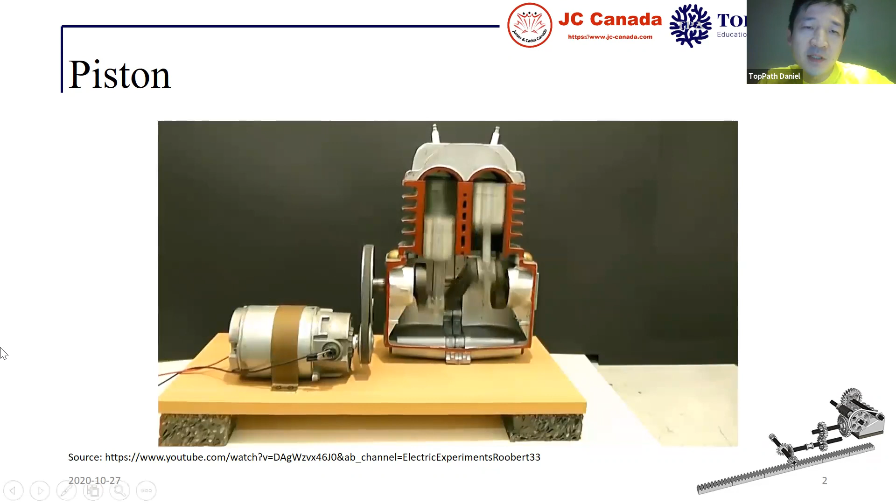Now let's have a video. This one is a very important part in our car. So yeah, just like this, right? So we need this thing to drive the wheels, so it can go very fast like this, right?

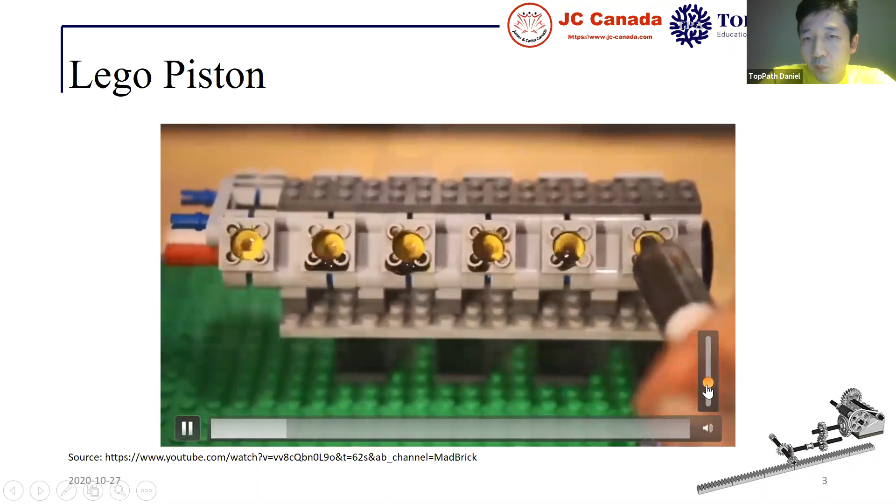Okay, now today we try to build one. And also we also have Lego piston parts like this. Yeah, they are official Lego parts, right? They are all Lego pieces.

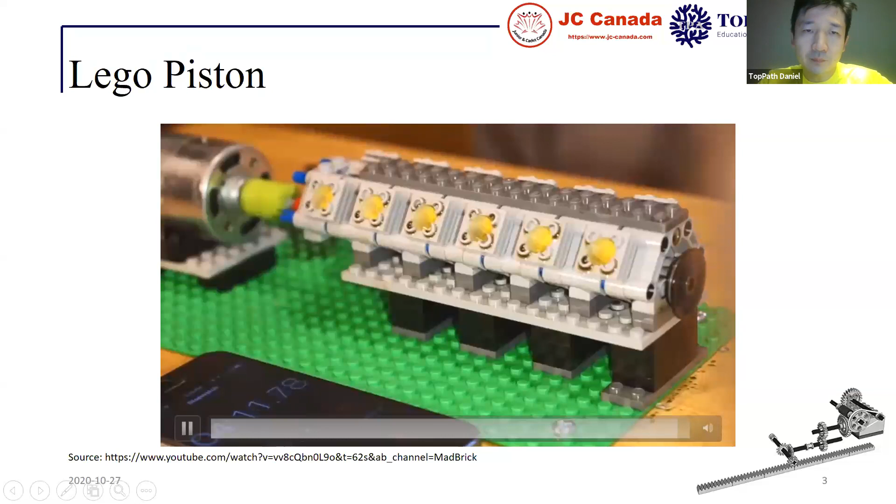Yeah, it can also run very fast like this. But inside you see we have these yellow things, right? So we can learn something about the structure inside.

Okay, it's called slider crank linkage. So we use slider crank linkage to convert rotary motion into back and forth linear motion.

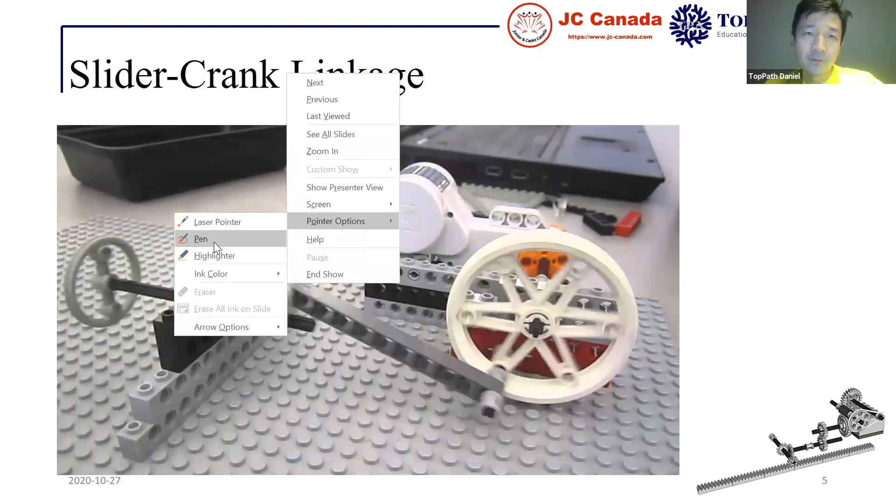Okay, now another video. Like this. So the yellow thing is this top, right? Okay, let me show you. Where is my pen? Okay, so let's see the video first.

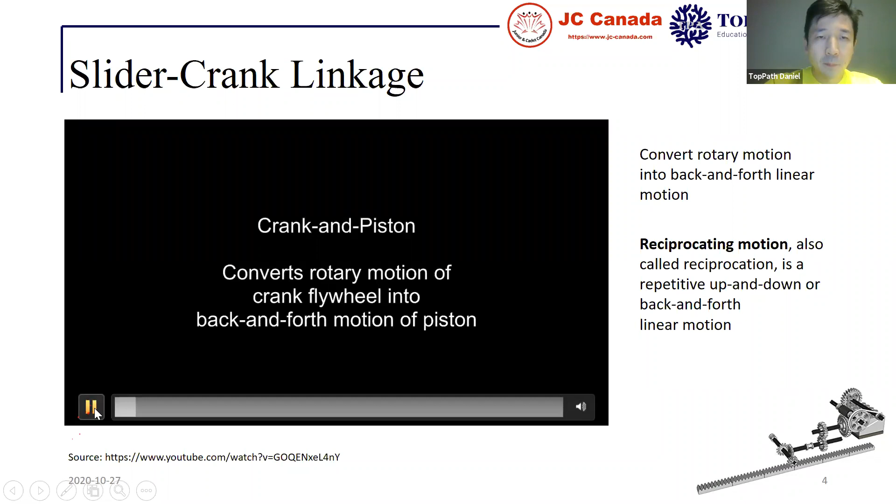Yeah, so we try to build this structure today. Okay, this is called slider crank linkage.

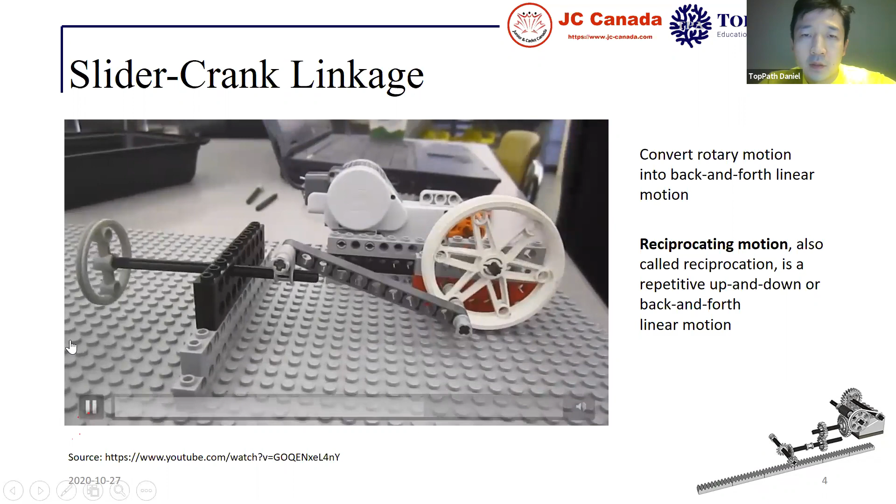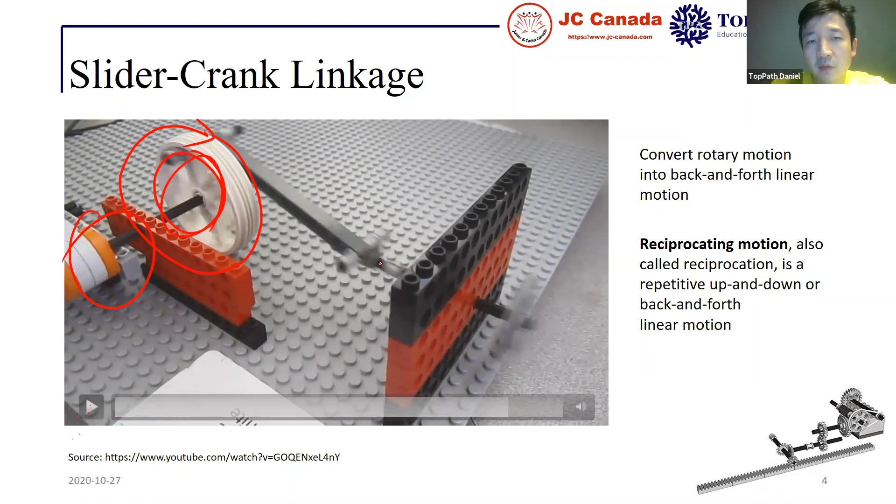So the reason why we need this is, okay, we have our power here, right? Motor, but this is a rotary motion, so we turn something, right? But usually we need back and forth forward. We need a linear motion, we need a straight line. So we can use this structure to convert rotary motion into linear motion.

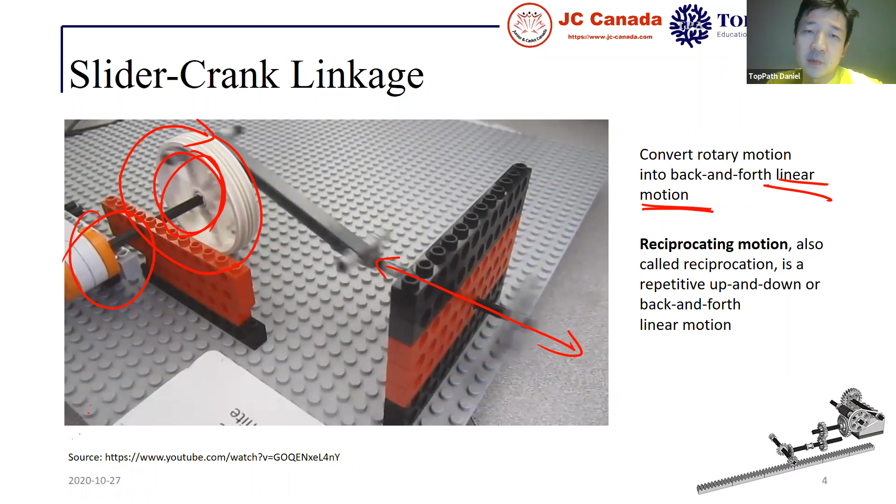Okay, for example, we turn this wheel and the black axle will go forward and backwards, right? And here we have two connection points. We need to use smooth pins or axles.

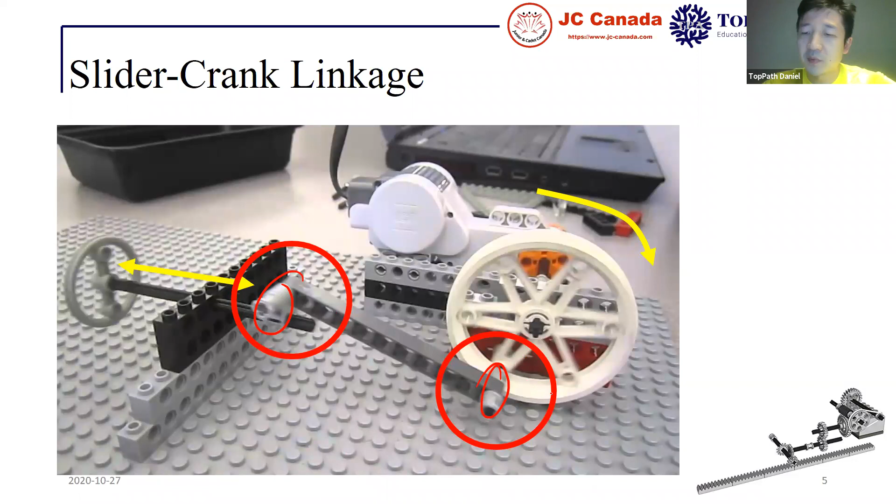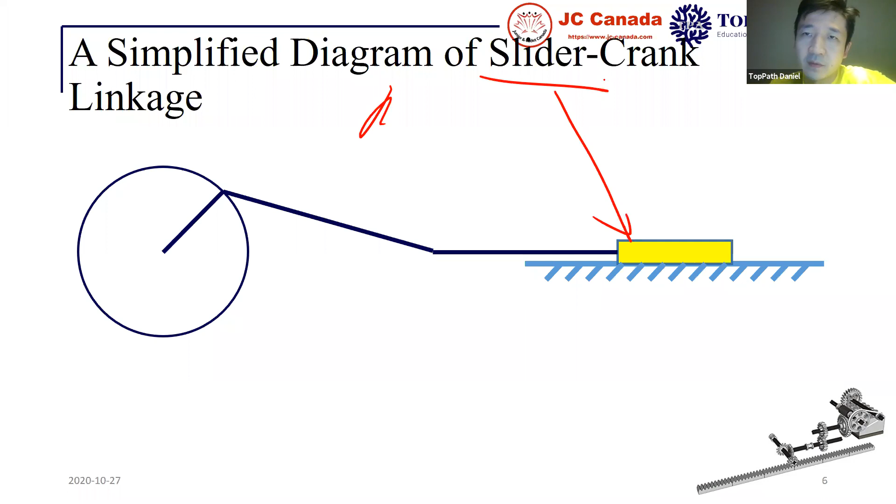So, for example, like this. Okay, so slider, which one is slider? Slider is this one. Okay, and the crank, we already use crank, right? So we turn this wheel, and this slider will go, okay, like this, right and left, right? A straight line.

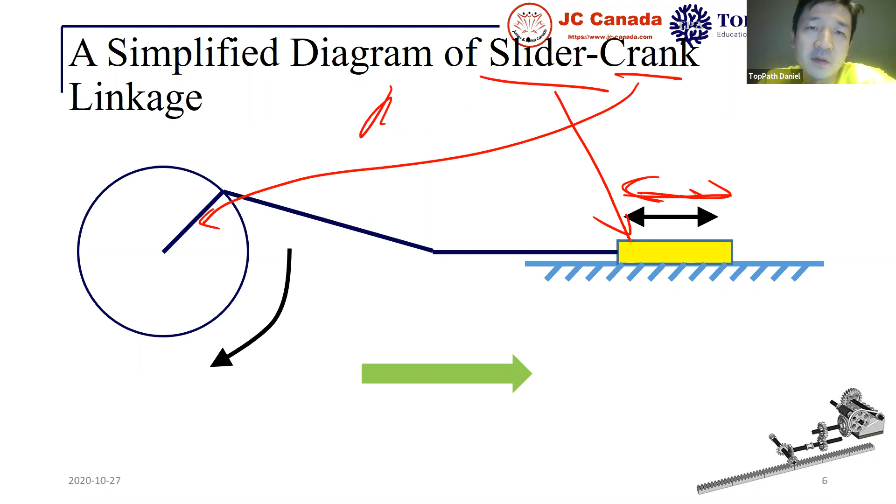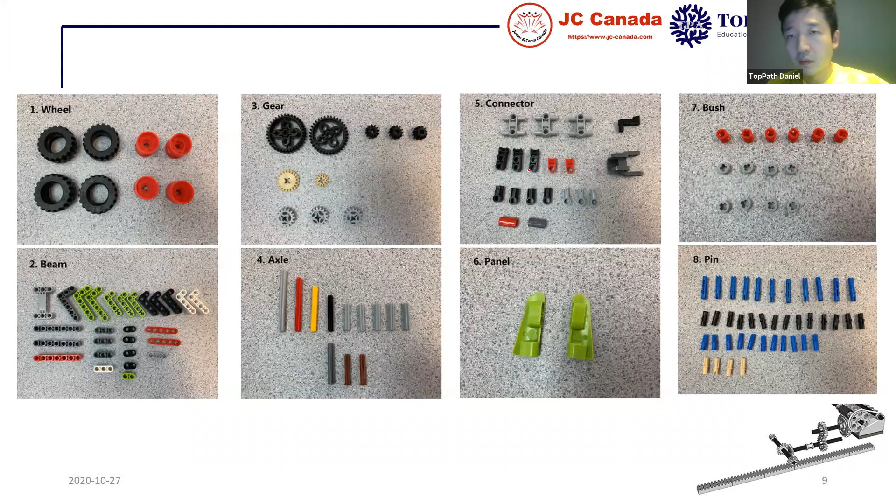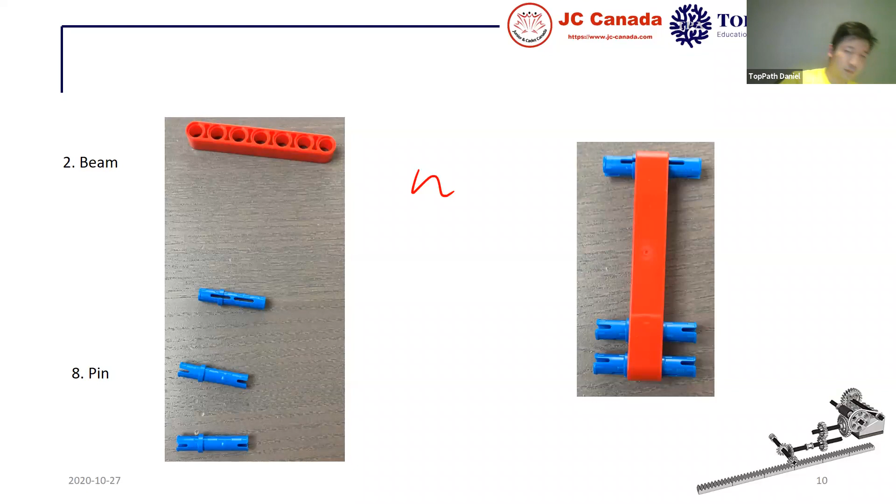Okay, done. Okay, next one. Green beam. Yeah, easy.

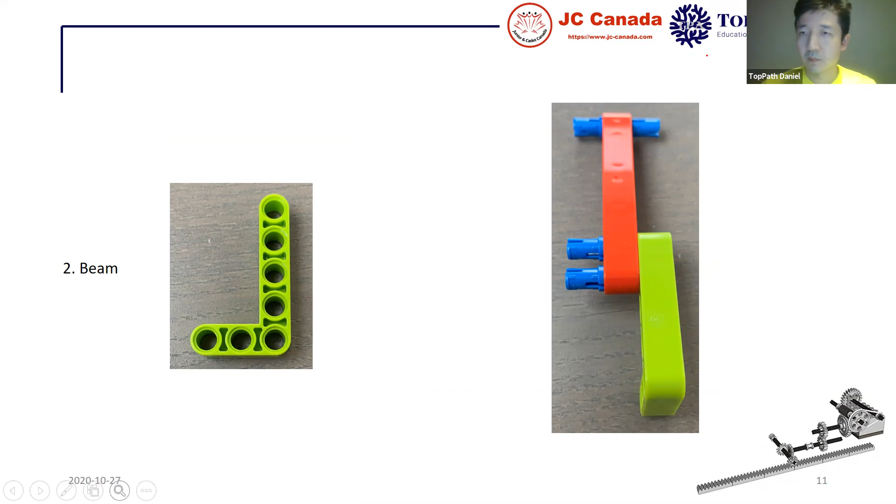Yeah, okay, good. Now four pins, okay, 4 pins. Okay, we have 1, 2, 3, 4 pinholes, and the last one is a cross hole, okay? So we use the 4 pinholes. One, two, three, 4. Okay, good.

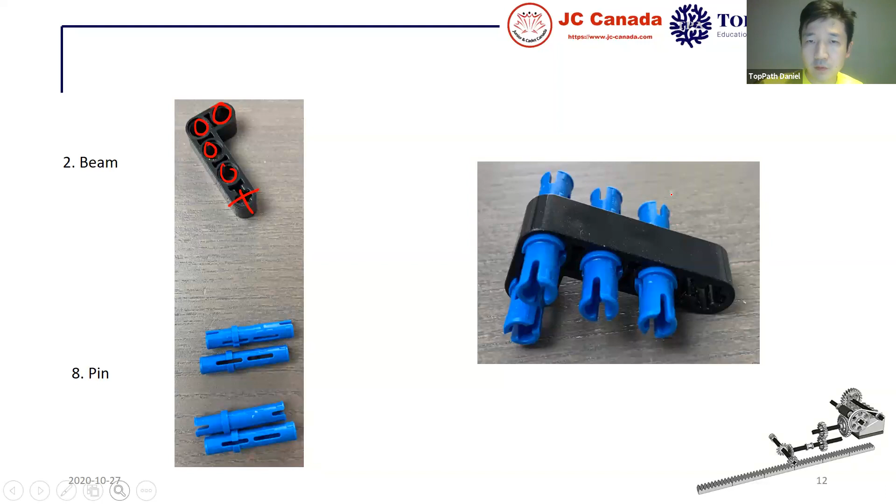Yeah. Okay. 1, 2, 3, 4. 4 long pins. Okay, good. Now two connectors, 2 pins.

So you already built something. So now you know these pieces, right? Yeah, good.

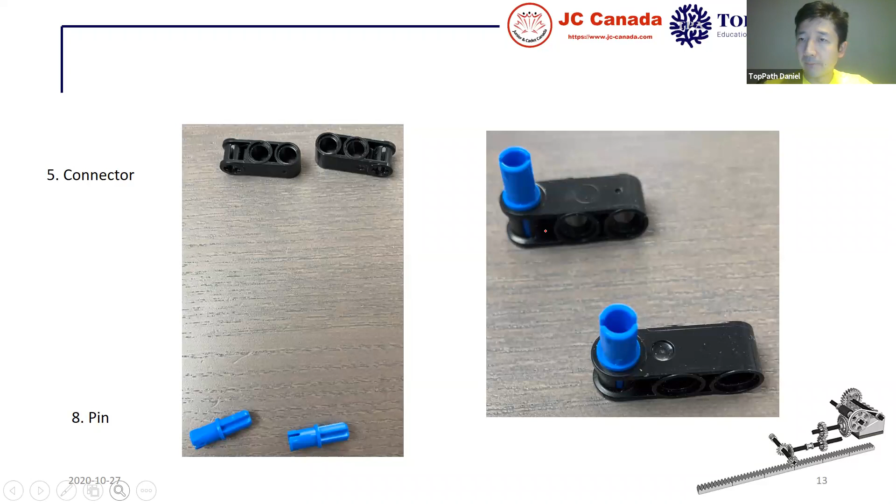Good. Next one. Okay, so we connect everything. Okay, this is the L, right? This is the L and 2 connectors. Okay, 2 connectors.

So the black L is here. Okay, the black L is here. Yes, we use the two blue pins, right? Okay, we connect all 3 parts together.

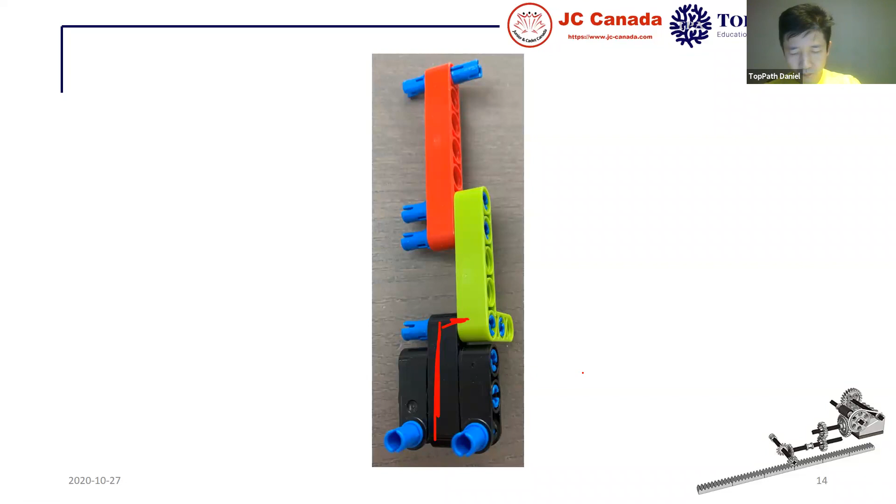You good? Good. Next one.

So let me see. We can put this bush here, and then axle, and then this green beam. Okay, I think yeah, maybe better. Okay.

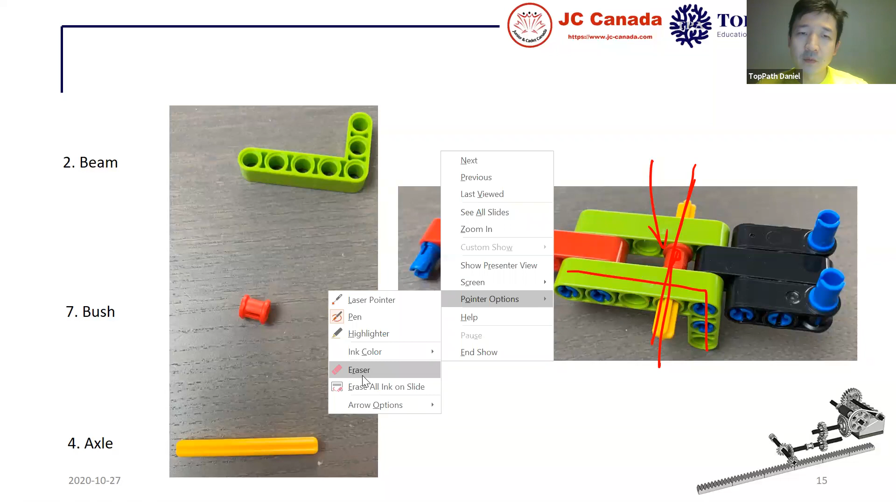Is that correct, Ethan? Where is this yellow axle? Which hole? Which pinhole? Okay, pay attention to this pinhole. Oh, even you, the same. Is here. Okay, 1, 2, 3, 4.

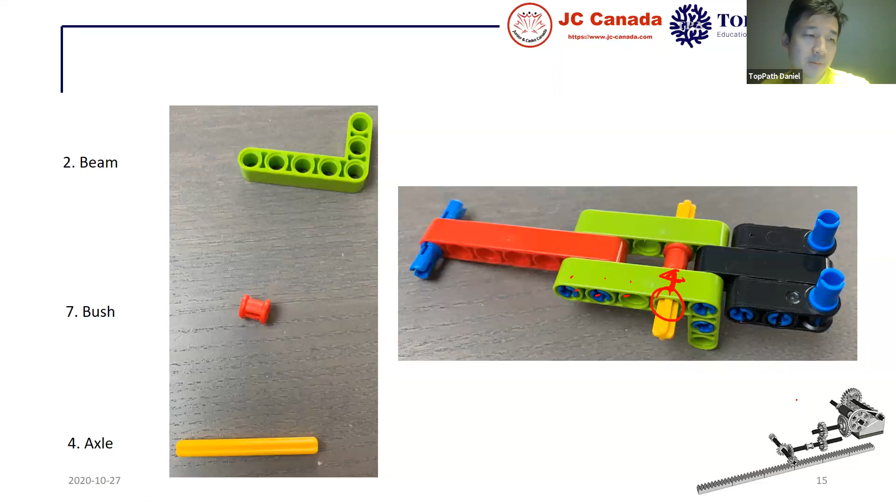One, two, three, four. Okay, the fourth one. Yeah, good. Now it's good. Because later we'll put the two black gears on this. Okay, these two sides.

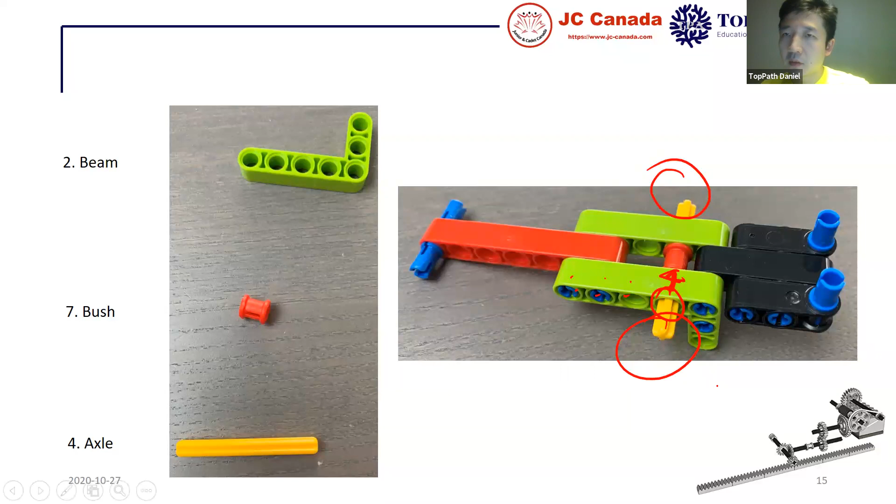Next one. This is what? 3 pin and 3. This gray is also 3. Okay.

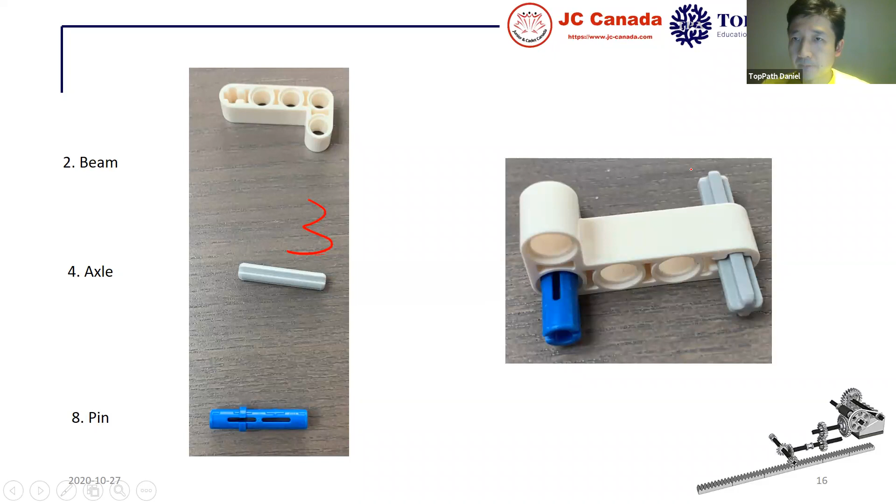The first hole is a cross hole, right? First one and the last one, okay.

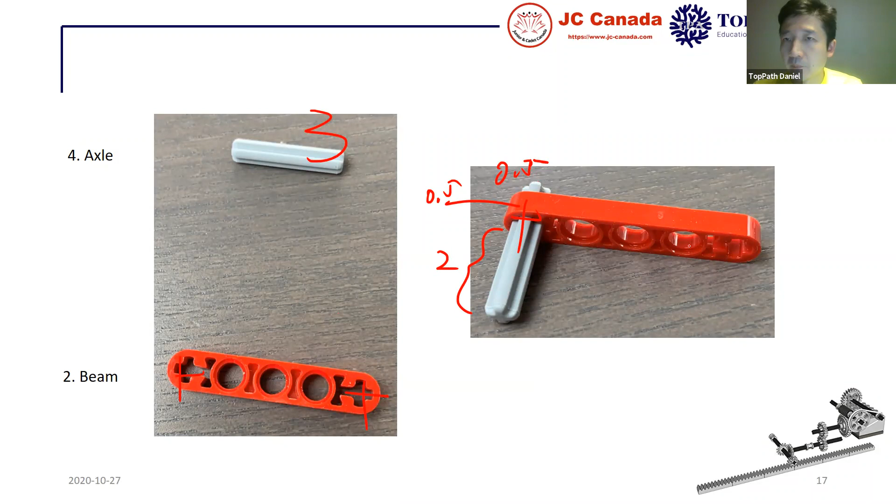Now, this is the axle, okay, on this half beam, okay. So we connect this pin. This is the middle one, okay. This pinhole is the middle one. And we use where? We use this pin, right? We use this pin.

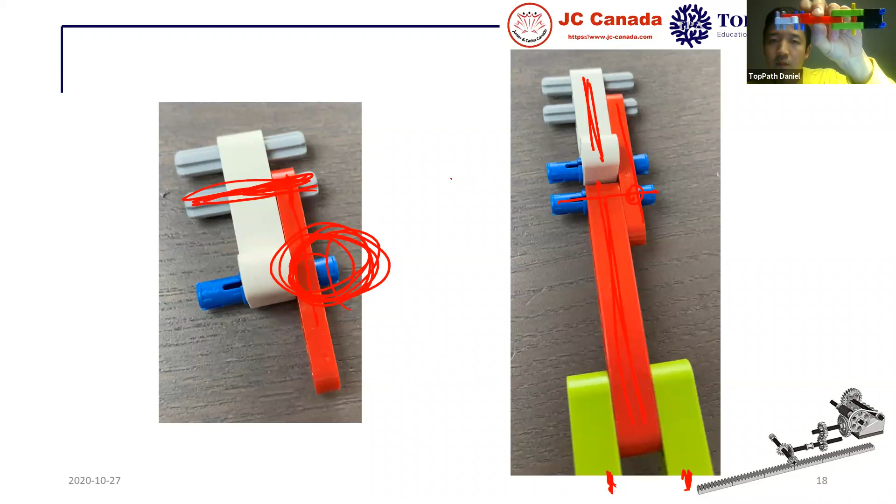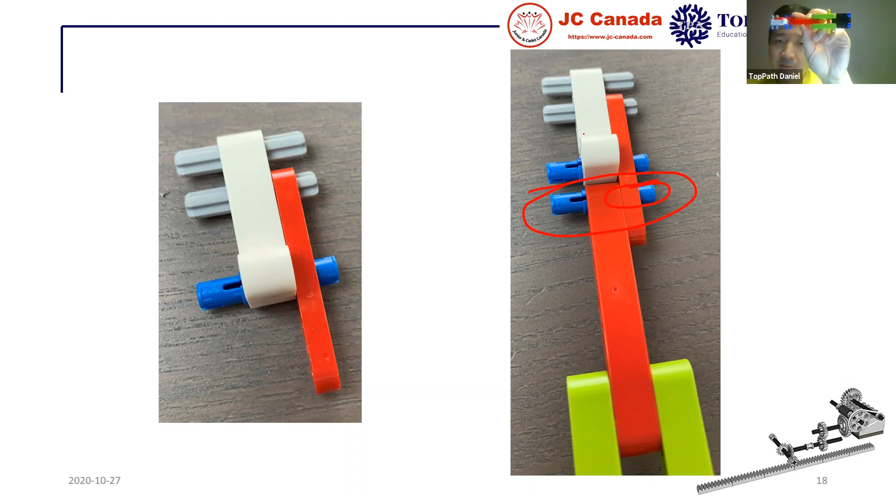Here we have only one connection point, this one, this blue pin. We have only one connection point here for now, and later we'll have the second one.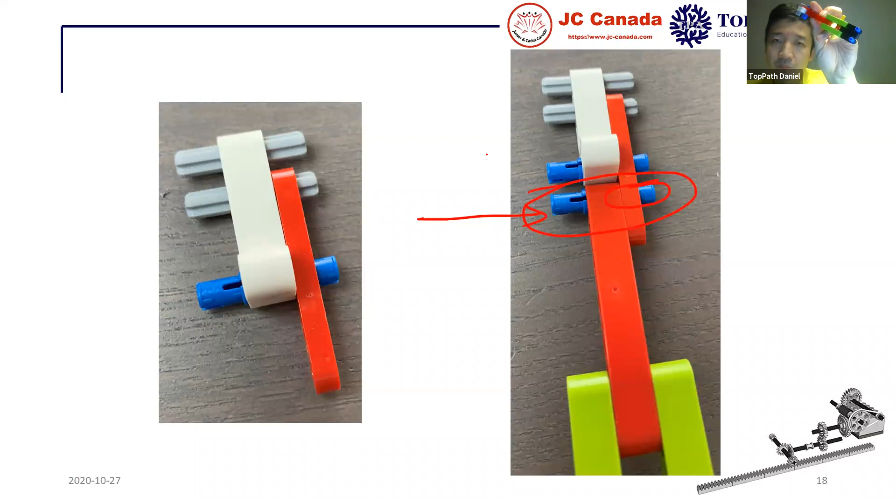So the red beam is here, right? And the blue pin, right?

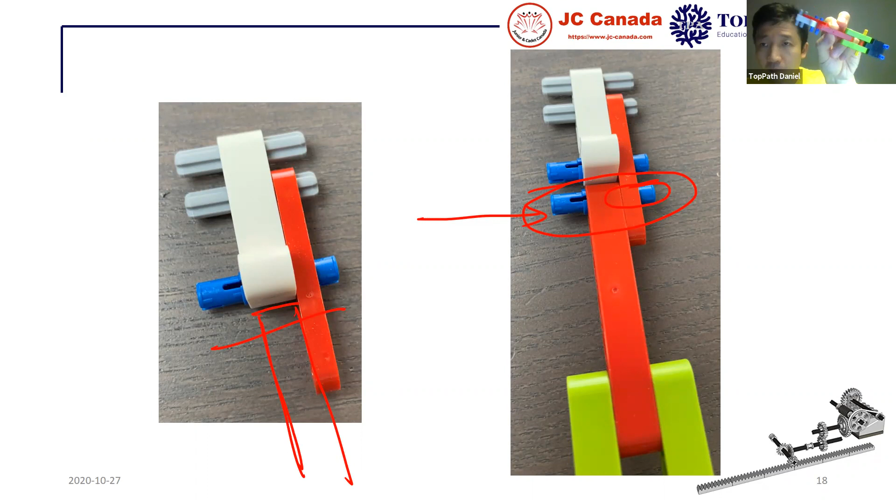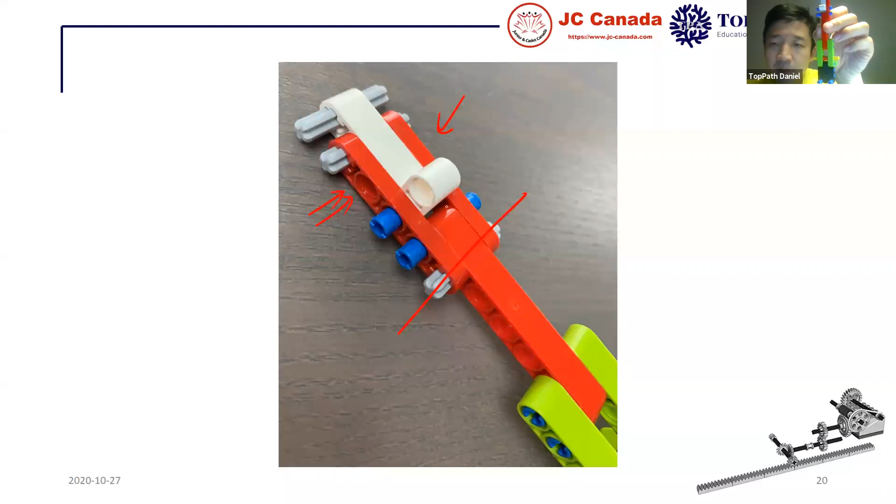Okay, now two more steps. Now you know how to do it, right? Two half beams on both sides. So one more axle and one more half beam. We use these two half beams to connect this white one and the long red beam.

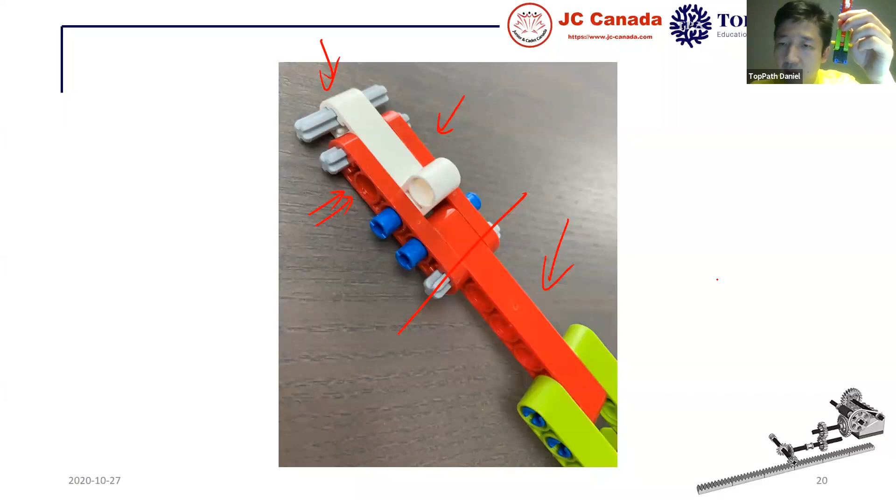Now it's clear, right? Ready? Good, Quintus, go. Yeah, Ethan. Ivan, how about you? Okay, let me see.

If you haven't finished the last step, we can also see this picture, right? And the two connectors, but pay attention, don't put it to the end. The connector is here, just here, don't put it to the end. You'll know why later. Don't put it too much, just half.

Two connectors. We don't need to put this to the end, okay? It's wrong. Okay, good, next one.

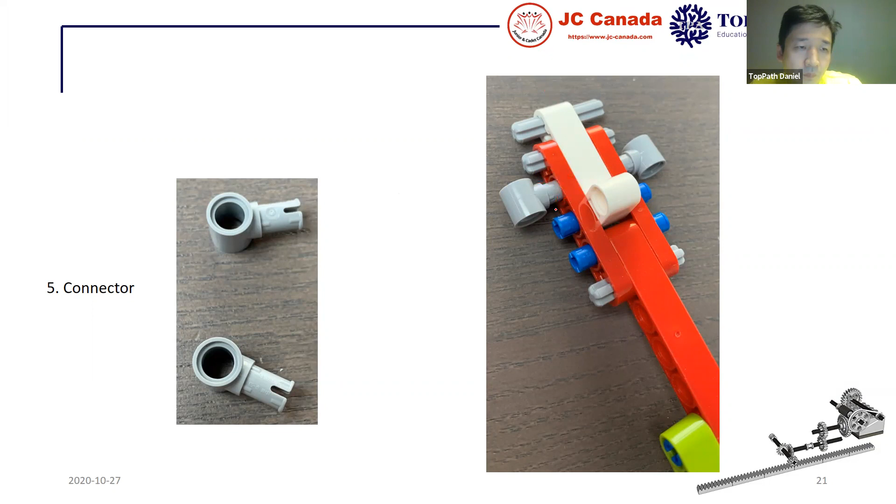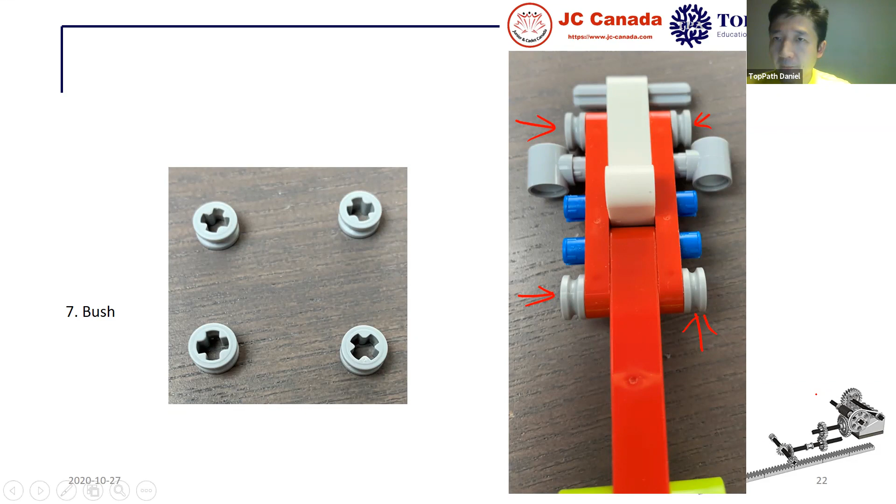Yeah, okay, good. Two different sides.

Here we use the cross hole and the cross hole here, okay? Good.

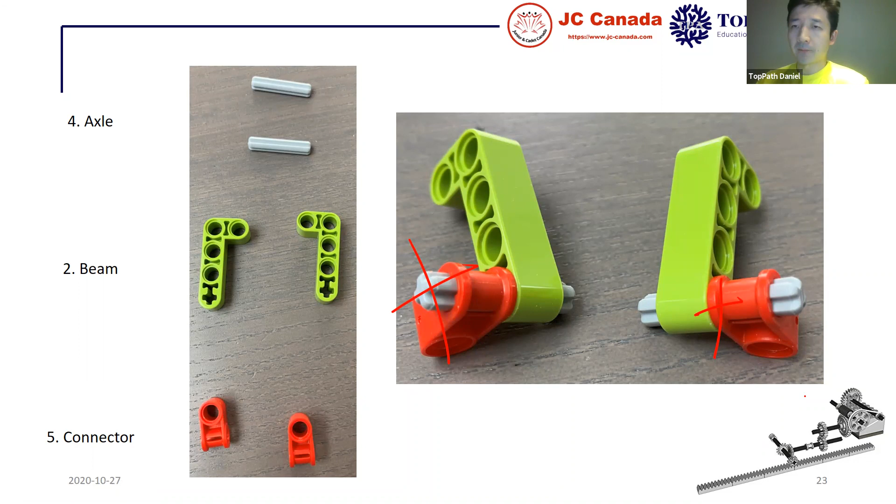Yeah, good, Ivan, you done? Good? Yeah, okay. 1, 2, 3. Easy step. Boom, boom. Yeah, good, this is easy.

Okay, next one is hard. So first, pay attention to which green we need to use. Just follow these pictures. First, we connect the white one and the green one, and then put it.

Let me see. Okay, so here we have a half beam, half axle, I can show you. Here we have half axle inside, right? This is the axle, and at this end we also have an axle, right? So we use these two axles and we connect the other side.

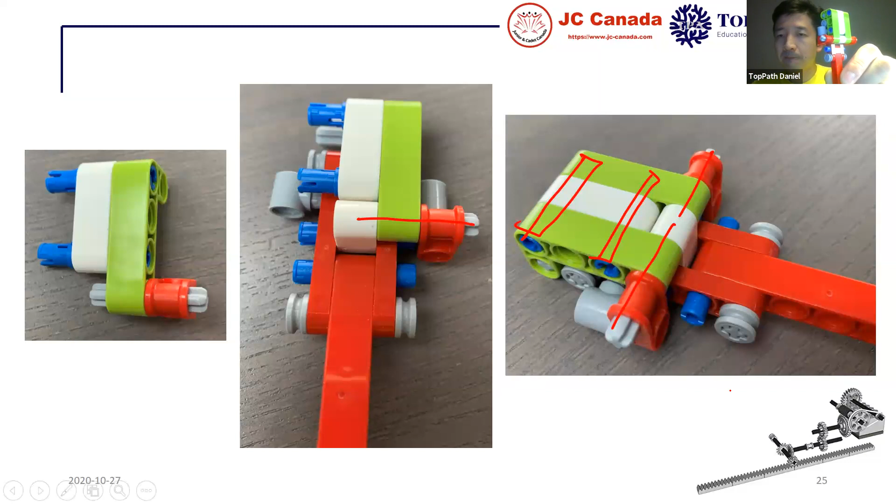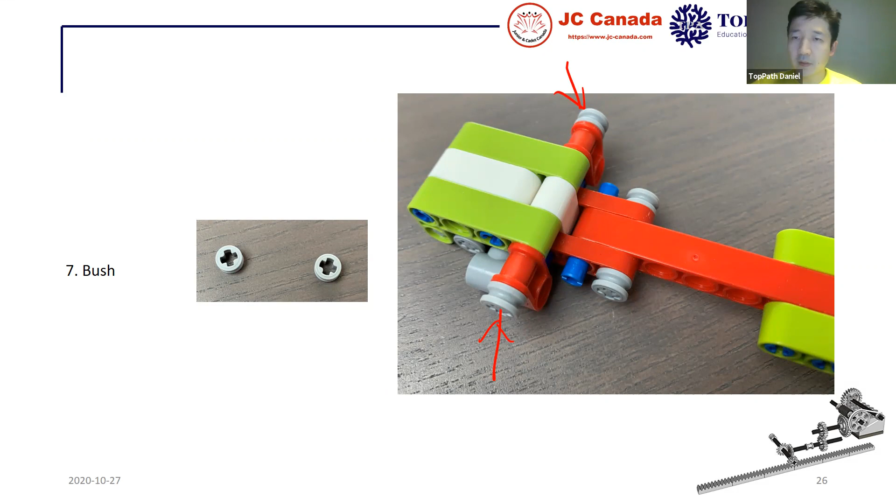Next one, oh, easy step. 2 bushes here and here. Okay, good. Okay, 2 black here, the largest one. Pay attention.

Here we have 2 cross holes and 2 pinholes. When we put these 2 on this axle, we need to put these 2 pinholes in the same position. Pay attention to this.

Okay, you're done. Now we have a car.

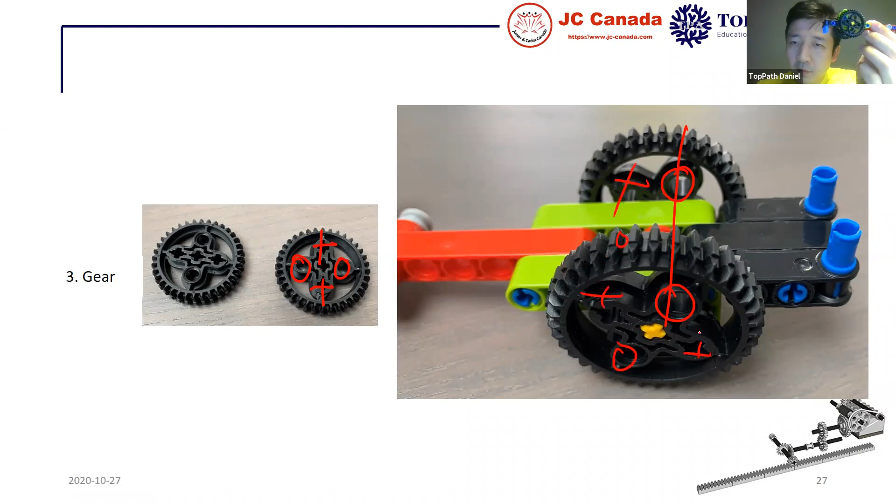So pinhole, cross hole, same position. Yes.

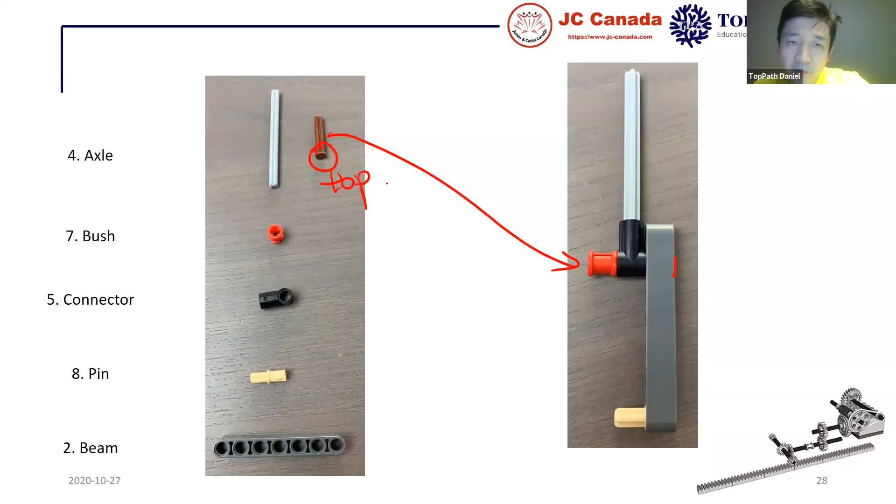Next one, several different types. Pay attention here, we use this, this is 3. We put the 3 here, and we have a top, right? The top is here.

Inside, this is the brown 3. The brown 3 is here. This is 7, this gray one is 7.

So we have a top, pay attention to this top. Don't put the top at this side, right? Because we have a top, so the other side we need this bush to hold this end, right?

This is the second pinhole. Here, this axle, the second pinhole, okay. Now the first one, okay.

So you put the brown short axle first, and then the black connector and the red bush, like this. Put the top at the beam side, not the bush side, like this.

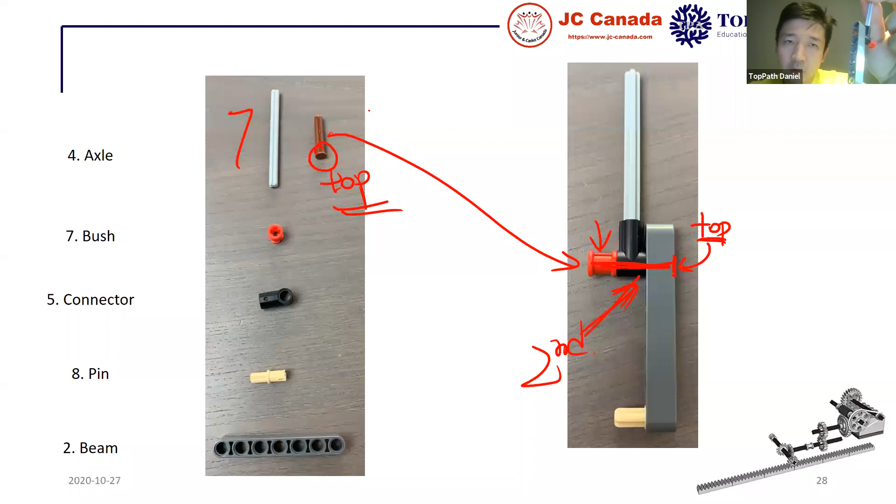So the brown axle first, and then the black connector, and then the red bush, like this, right?

Ivan, you done? Okay, good. Yeah, good, okay.

Everybody good. Now,

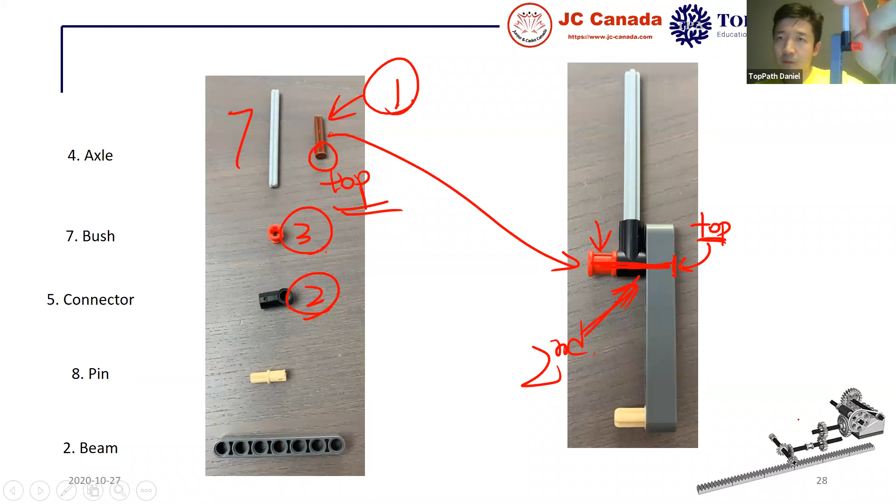Here we use this white pin, okay, connect to a cross hole, and we need to put this gray axle through 1 and 2, okay, through 1 and 2. So any cross hole you want, anyone you want. This side is a little hard.

You can take the gray axle off and just put it through the two pinholes and then connect to the black connector. You can take this gray axle off first.

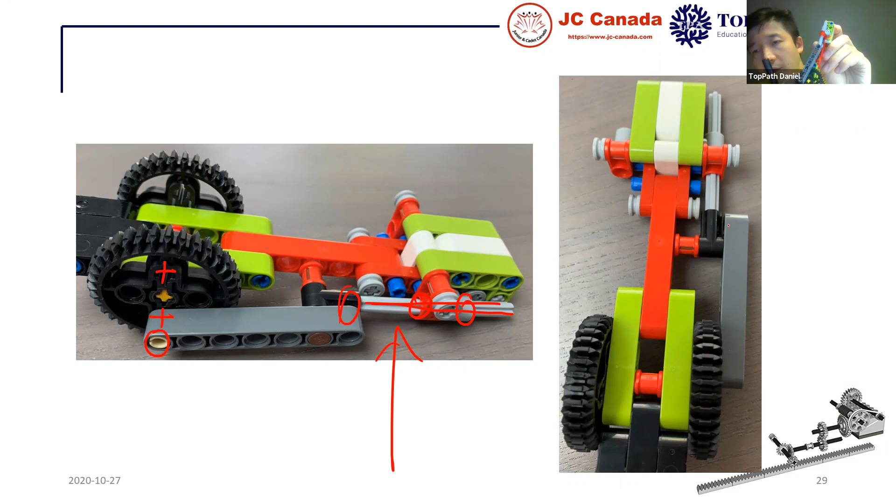Actually, this is a slider crank linkage. This is a slider crank linkage. If I use them, yeah, slider crank linkage.

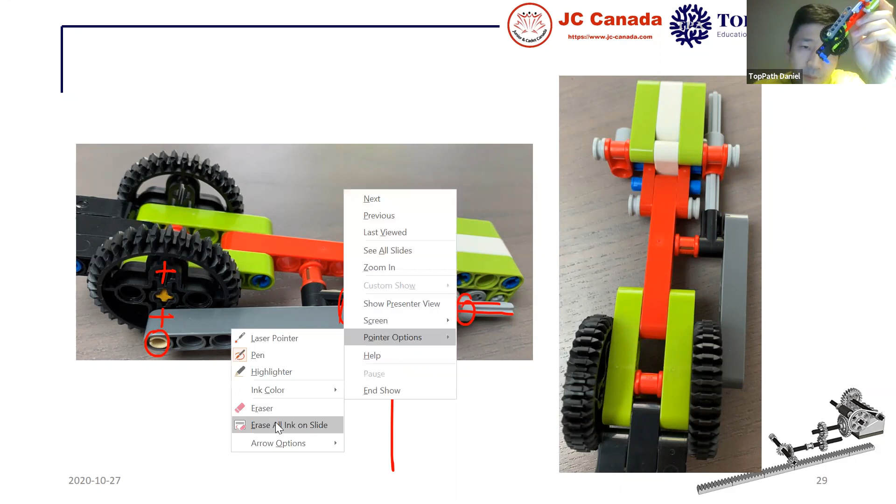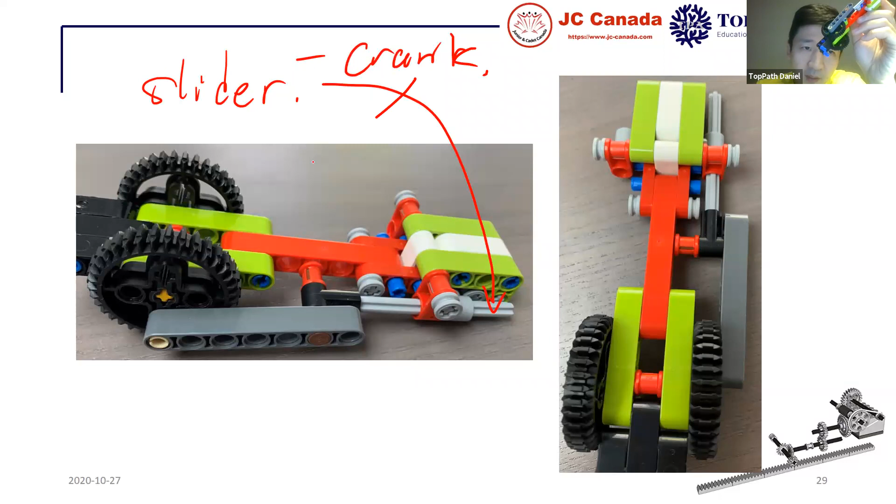Now here, okay, slider, where is the slider? Slider is this one, this axle is slider, right? Crank, where is the crank? Crank is this short, okay, distance from the center to the cross hole. This is the crank. So we turn this black gear.

This gray axle can go, okay, in a straight line. This is slider crank linkage, like this. You see?

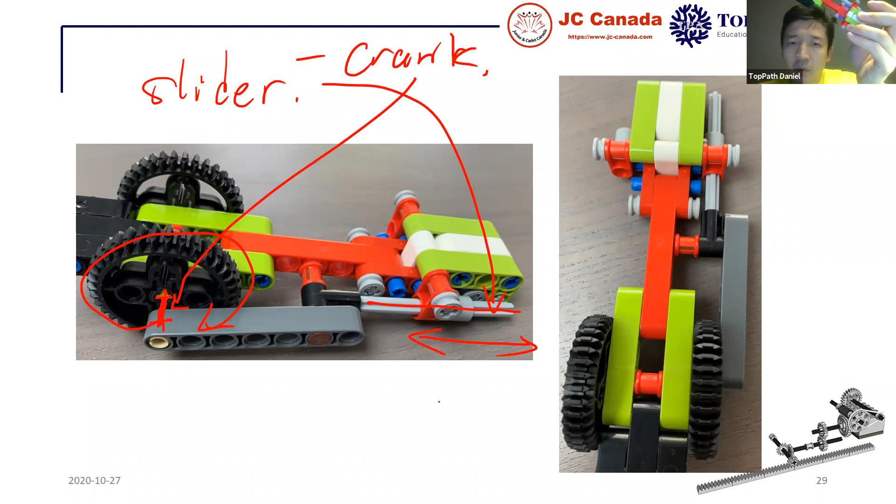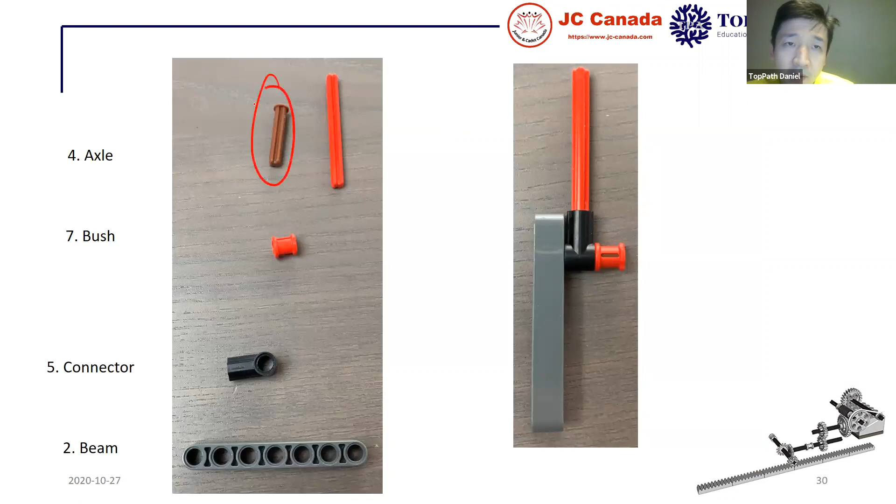Okay, the other side, we have two sides, right? The other side. The brown axle is here. Okay, top is here. Okay, the brown one.

But we don't have the light yellow pin. So don't put the light yellow pin here.

Just like this. Yeah, good.

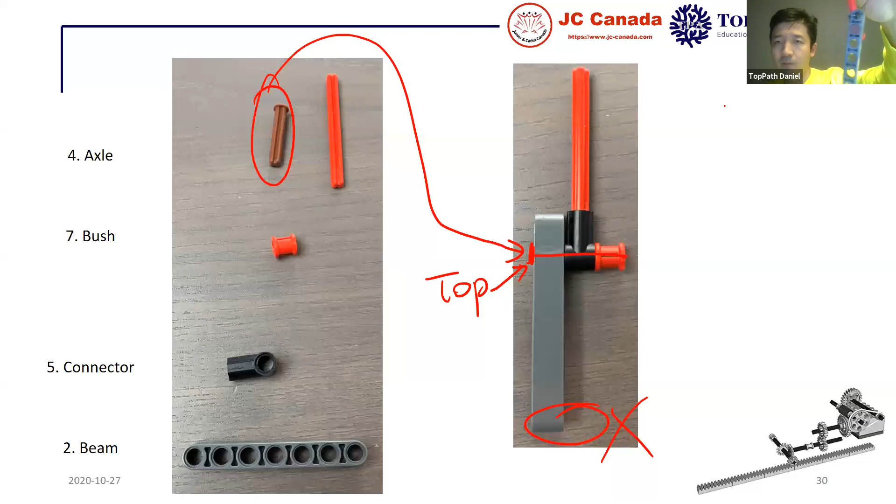Okay, now you know where to put this, right? We use a 4 axle. Okay, now look at here.

On this black one, we have 2 cross holes. Okay, now pay attention to this gray beam. We use 2 different cross holes on these 2 sides. One this way, one this way, right?

So if you put 2 on the same cross hole, they will both go up or both down. But it doesn't matter actually. If you want 2 up, 2 down, or the same direction, it doesn't matter. But different direction, the different one may be better.

So this black one is 4. One in this black gear, and here 1, and outside 2. Okay, outside 2.

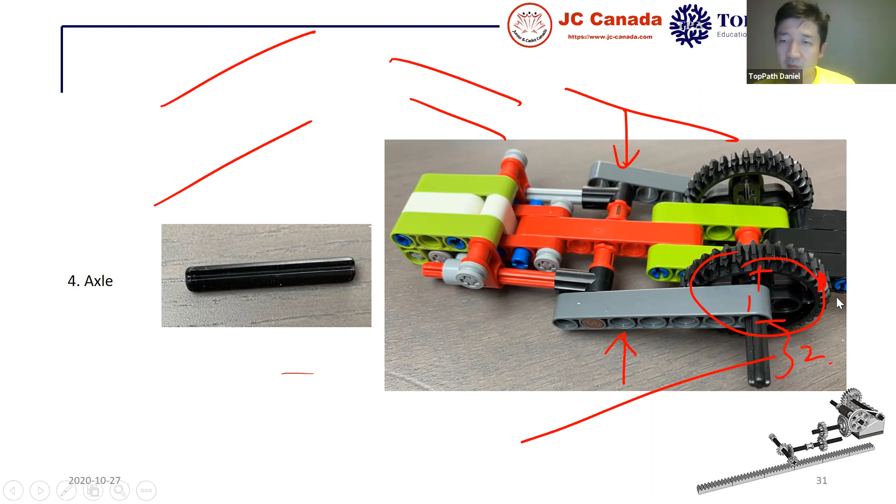Now we have 2 slider crank linkages. We have 2 slider crank linkages.

So later we'll drive this black gear. So if you put these 2 on different pinholes, these 2 axles can go up and down in different directions, right? One up, one down. Okay, like this.

So we have 2. They are both slider crank linkage, right? So this black gear is the crank, and these 2 long axles are sliders.

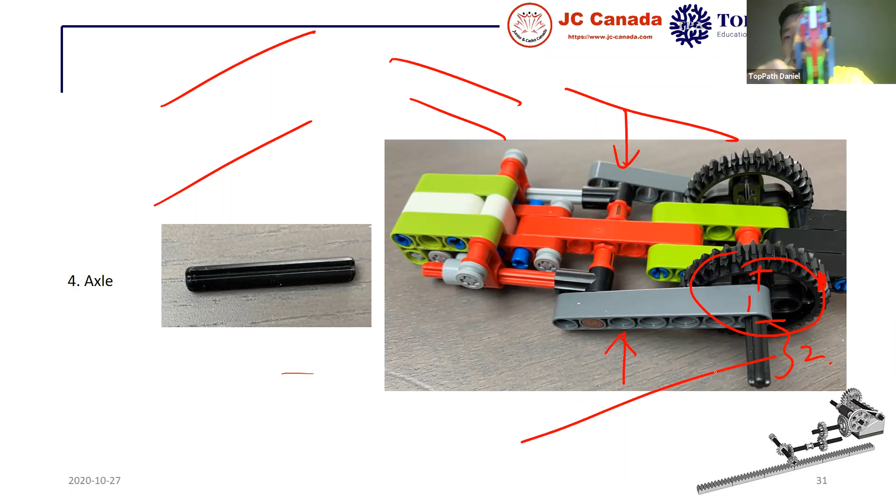Good, now, next one. Now here, this crank, right? Okay, now we use this. So first one, put the bush first, and then this, right?

Pay attention here. This axle and the center of the black gear, they're on one straight line. This axle, and the center of this black gear, one straight line.

Because later we'll drive this axle. This axle must go through the center of these two big gears.

So you put the black axle first. You put the black axle and the red bush first, and then put the crank on the big gear.

So just pay attention to the direction. Okay, I'll show you. Like this. Like this.

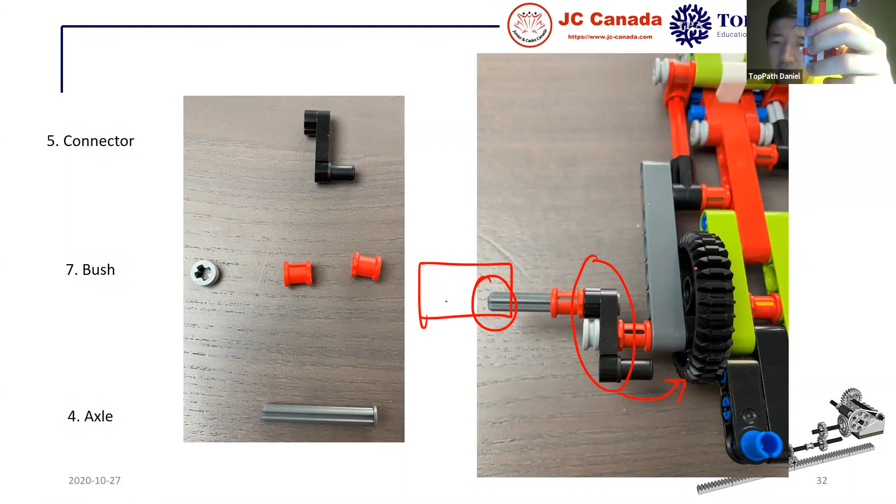I put this on the wrong side. Wrong side? Yeah, okay, I draw this. Here we have the yellow one, so just pay attention to this step, okay? The yellow one, just put it on the wrong side. Okay, the yellow one and this gray one. Is it okay that I put it on the wrong side?

Wrong side, it doesn't matter. Okay, it doesn't matter, we just need the gray axle. Okay, any side. You mean you put the gray on what? The light gray on the light gray side, not the red axle side. Yeah, it doesn't matter. A bit of gray on the red side, red on the gray side.

Okay, now we do next. So you see, I only turn this one, right? I don't move. I don't need to rotate like this, right? Okay.

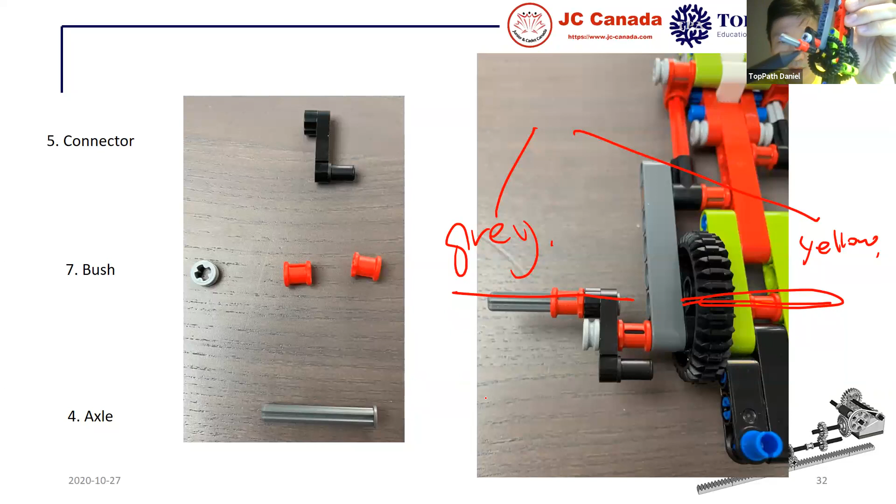Here, this yellow axle, and this gray axle, same, in one line. Okay, now next, oh, the same thing. You see, this is clear, right? This is clear. So on this straight line, okay, two axles, the yellow one and this gray one on one straight line, okay?

Next, now we build the base, okay? This part is easier. We build the base. Actually, the slider crank linkage is already done, okay? Now we build the base. Finally, something easy to build.

Switch. 1, 2, 3, 4, four pins.

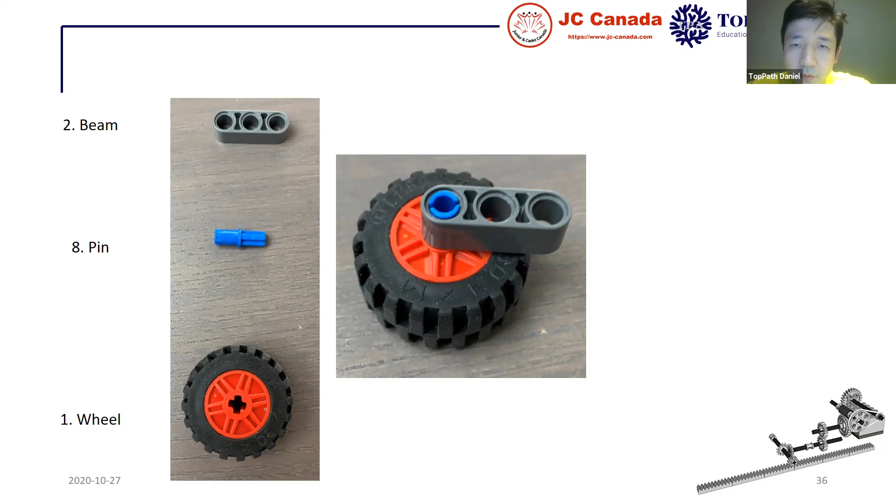The last one is a blue one, right? Okay, the second wheel. Easy, yes good, this part is easier. Yeah good, now these two and yeah, 1, 2, 3, 4, right? Okay.

Yeah, actually this is just a... uh-oh, no, even. Okay, we put the two wheels on the same side. The same side, okay.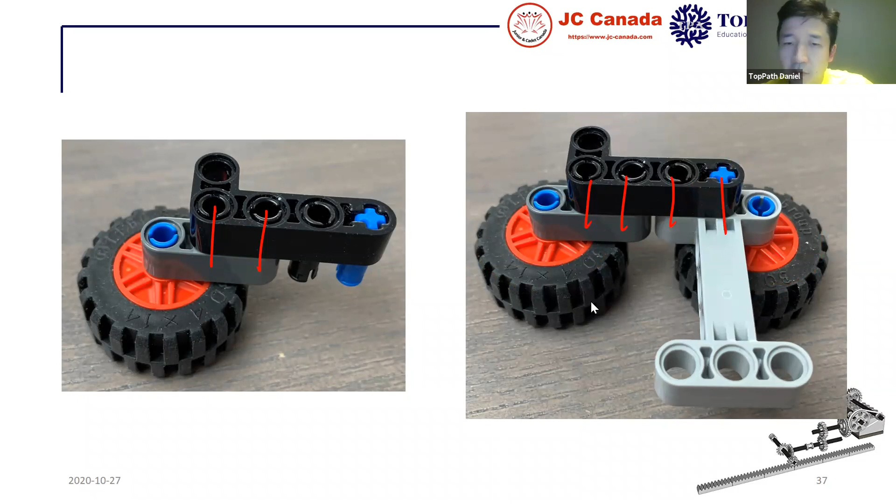Yeah, now it's good. Okay, next one. Four pins again.

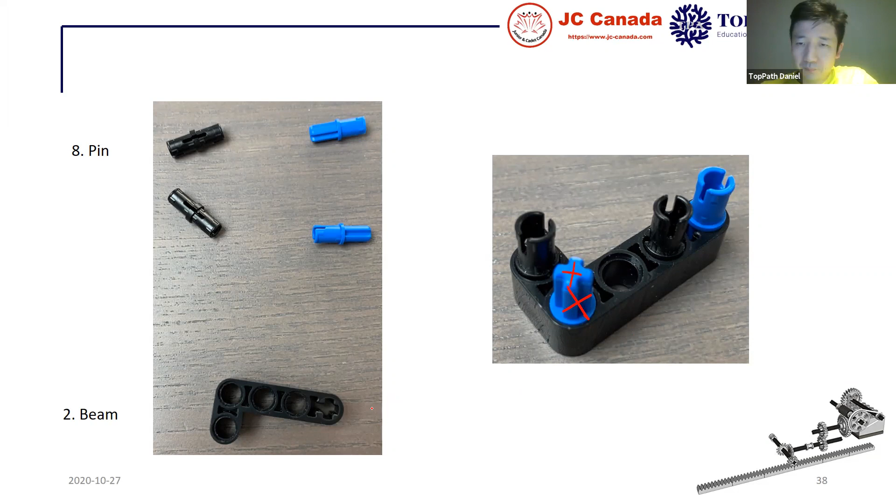This one, okay, this is a cross outside, maybe like this. Okay. The third wheel. E? Yeah, the third wheel, okay.

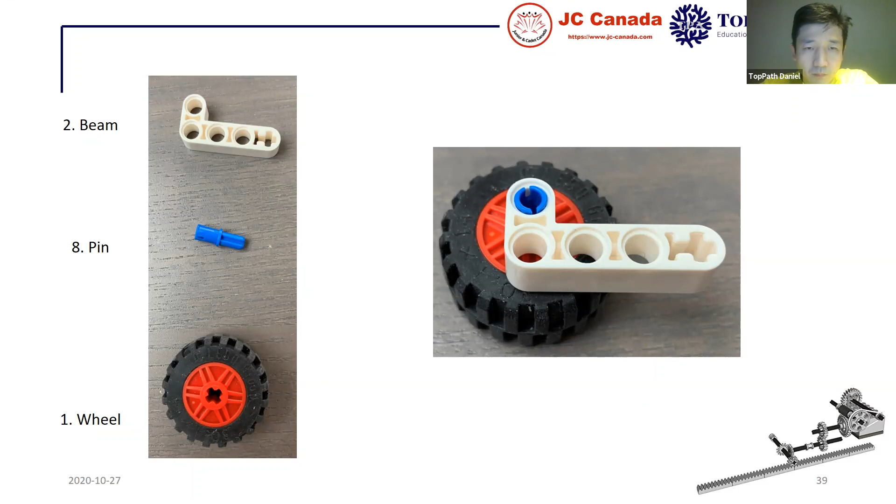Okay, the black one, the black axle here, and the other two pins on this connector, beam. Now we have three wheels. Okay, three wheels now.

Actually, for this base, you can build any kind of base you want. Okay, base part is easy. Here we have two blue pins. Remember, at the bottom we put the top. Okay, here we have 1, 2, 3. Okay, we use the two blue pins, right? Two blue pins here.

Now we put the top on the bottom, right? Let me see. Am I correct?

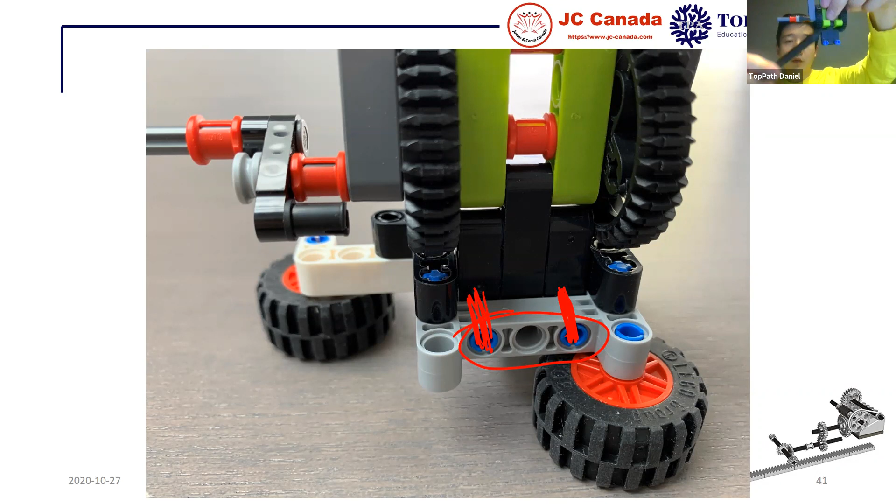Okay, so you can change these two blue pins. Do we need to put the white pin during the switch? Yes, so you do this. You change these two blue pins from back to the front side. Oh, okay, yes, you change these two blue pins to the other side, and then, okay, you can change the direction.

So this axle and this white beam, okay, the same side.

1, 2, 3. I'm not done.

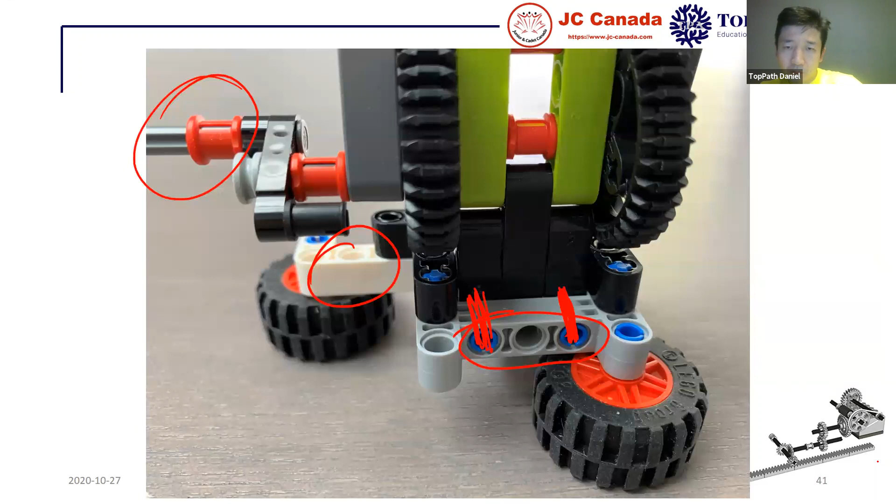Ivan, you done? Okay, this one, 4 black pins. Yeah, this is easy. Just something to hold the last wheel.

Okay, one connector, one blue pin, and one short beam. Yeah, good.

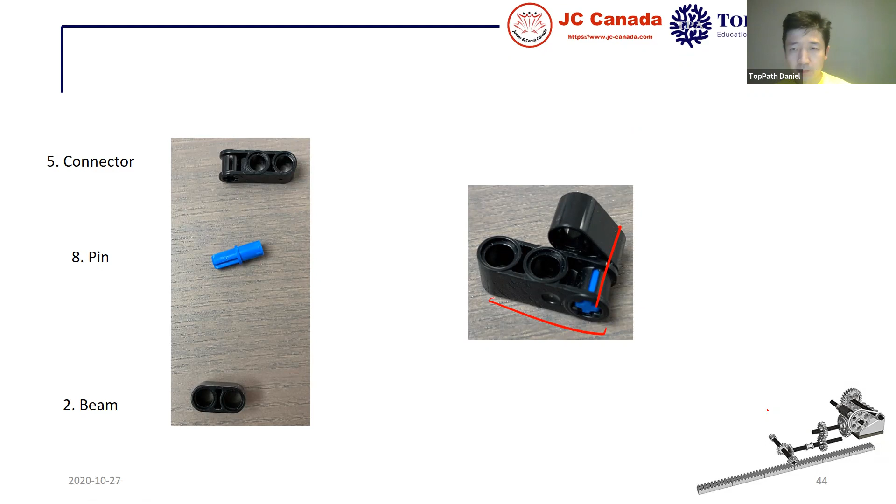Now put everything together. One blue pin first. And we use this short beam, right? This is the short beam. And then the green beam. 1, 2, right? Yeah, good.

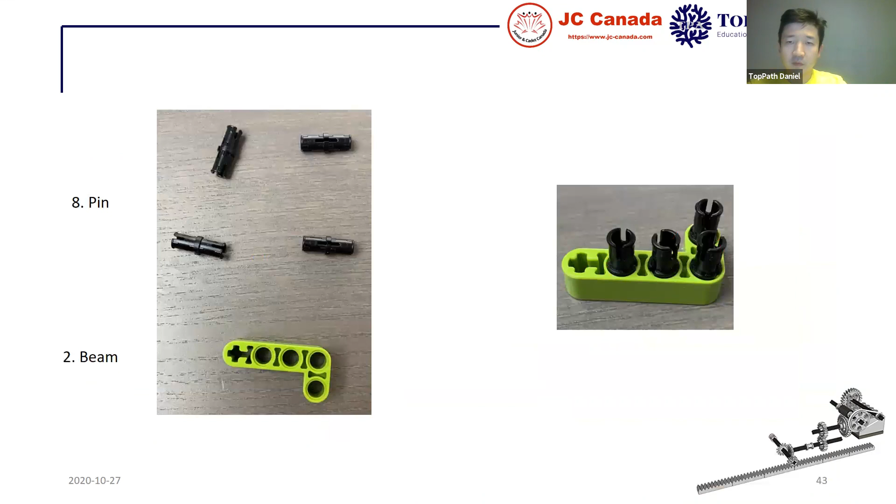Just like this. I don't have the blue pin. Blue pin, this one. What, that one? Okay, if you finish this, it's done. You can turn this axle, and you can also put the motor on.

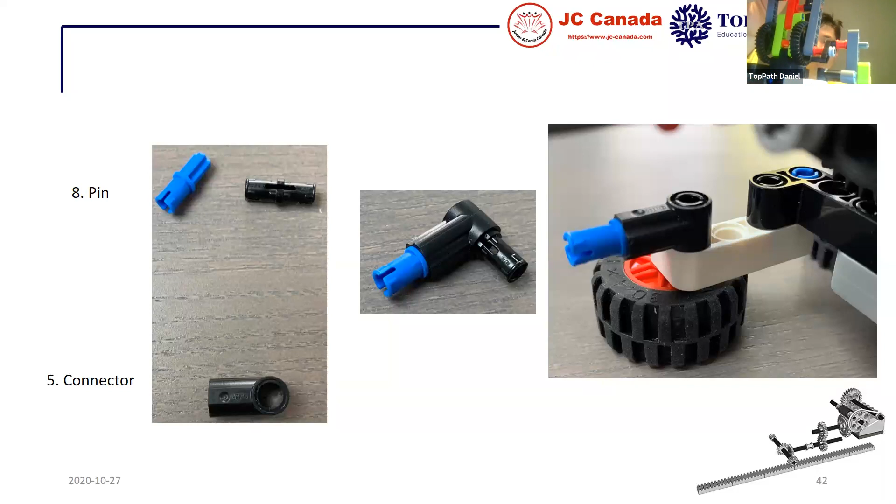So, as this way, okay, then put one connect to the... I don't know how to connect. How do I connect this? You connect to the green beam first.

The green beam first. We have 2 black pins on the green beam, right? The last wheel. And here, this is an L, right? 1, 2, 3, the last pinhole connects to the blue pin. Now look here, like this. The blue pin is here, right? This is the blue pin on the white beam, right? Here.

Ethan, good. You're done, you can try the motor. Two black pins, and then the motor, okay. Here, Ethan, look at here. Two pinholes, right? Put the two black pins in these two holes, and then the motor, okay.

This is just... I can't connect this. What connected? Now look at here. I know maybe you put the black part on the wrong side of this beam. You check, show me the bottom. No, oh, yeah, you see the difference.

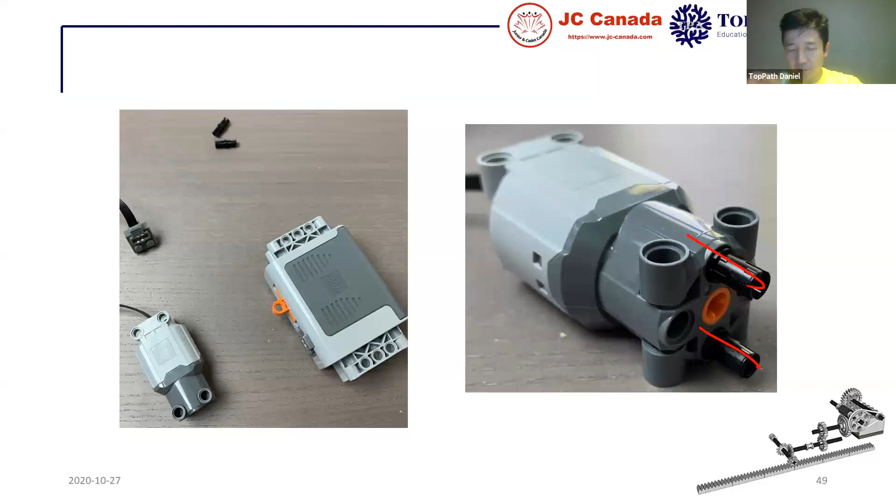Two black pins and connect the motor to the gray beam. Okay, pay attention to this part. So when you put the motor on, remember to hold this side. There is a gray axle inside, so hold this side, remember to hold this side. And now you can connect to your battery box.

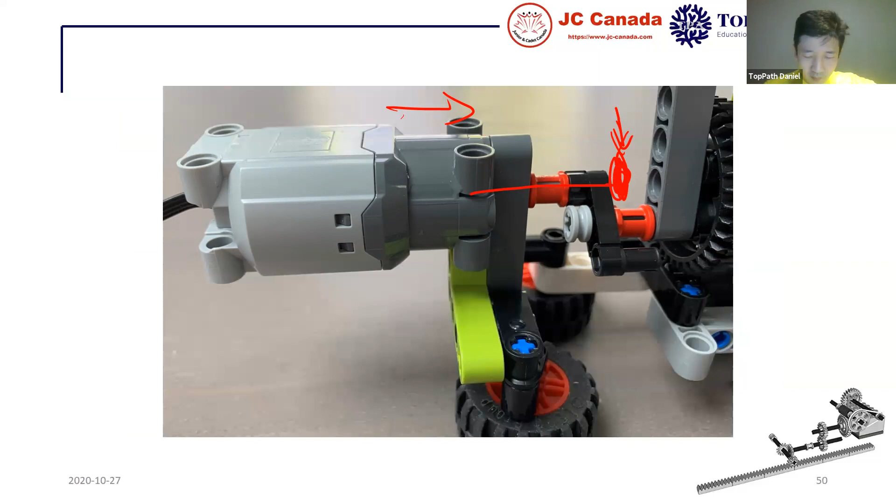Ivan, what's your question?

Now look at the bottom. The black one and the white one, they're on the same side of the gray one, okay. So you need to move the black one to the other side. If they are on two different sides, they are too far apart to connect.

Ethan, you done? I did it wrong, I can't do it. The same links. How do I do this?